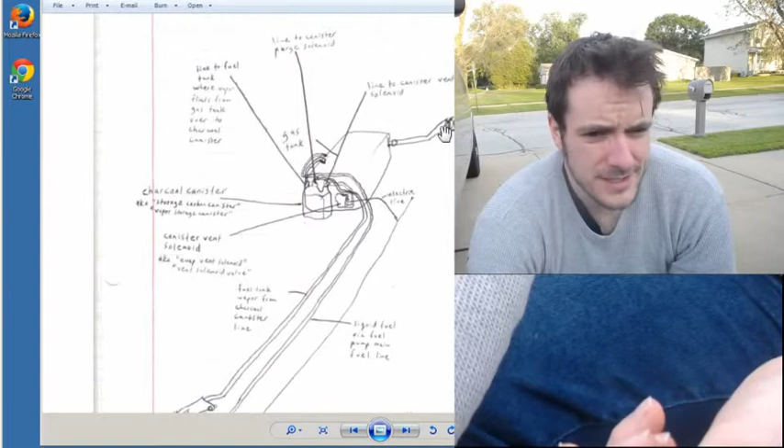Inspect. Okay. After each of these, you can retest it. If there wasn't any rust there, obviously you know that's probably not it, but you could still lube it if you want. Okay. Inspect the gas pipe neck for rust and pinhole leaks under the rust. Repair if found and retest. Okay, so that's saying inspect here underneath the gas cap, inspect that for any pinhole leaks or rust, which I've already done.

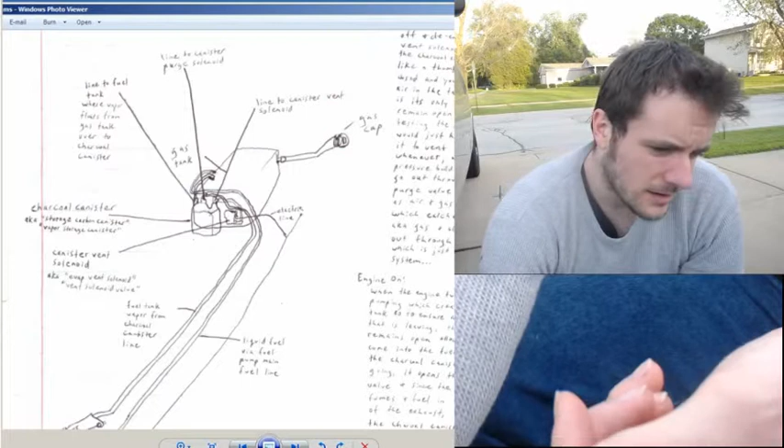Let's see. Where am I at? Okay. If that doesn't do it, inspect gas cap pipe all the way back to tank and inspect all fuel lines and rubber hoses leading from the gas tank and running to the engine, and all hoses inside the engine bay as well for leaks. Visually inspect, repair if found, and retest.

Okay. No, I'm not running Windows 2000. I'm running Windows 7 Classic theme. Okay.

Next, if you don't find a visual leak and solve it, locate your charcoal canister purge solenoid valve inside the engine bay. With vehicle off, blow air pressure toward that with a handheld air vacuum pump, a few squeezes to about halfway point on the meter. If it holds pressure, that verifies it's turned to the off position and fully closes when off. Your purge valve is good. If it does not hold pressure with car off, purge valve is bad. You need to replace and retest system. Okay.

So the next thing is from the charcoal canister purge solenoid valve inside the engine bay. Detach hose from that, which leads to rear of car's charcoal canister, which is a large black box with charcoal inside that filters gas fumes. Attach handheld vacuum pump to that hose, the hose coming off the purge valve, leading toward the back of the truck.

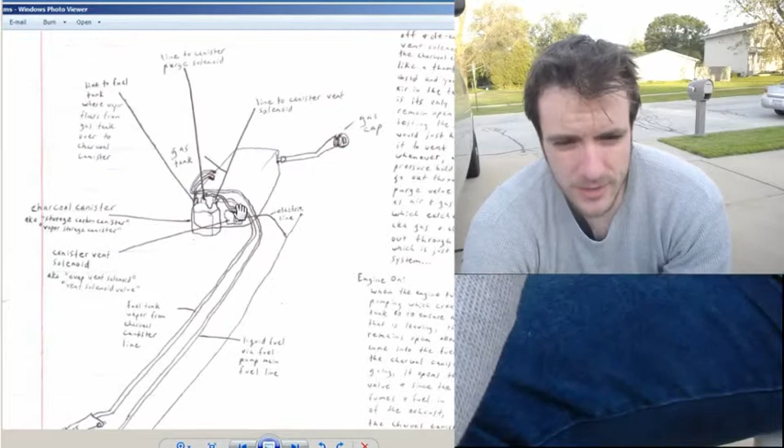Locate the charcoal canister vent solenoid valve after you've connected the handheld air vacuum pump. You're going to locate the charcoal canister vent solenoid valve, which is back here. You're going to pinch off this line, the line leading to it. Because it's open with the vehicle off, you need to pinch it off so that no air can escape when you do your air pressure test. Okay, connect it to this hose on the back end.

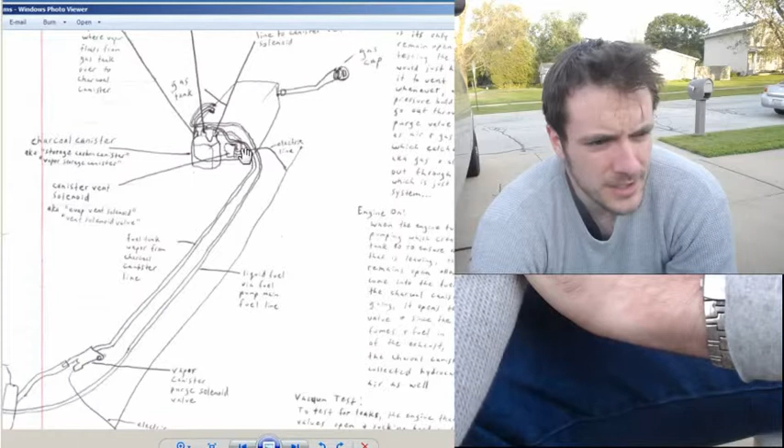We're going to be blowing air through this line into the charcoal canister, filling the charcoal canister, filling the gas tank. It won't be able to come out through the vent valve because we already clamped this off with a vice grip, and our gas cap is screwed on tight. So when we blow air through this line going this way, it should not be able to escape. If you see it escaping, then you know that there is in fact a hole somewhere, and that's when you do your smoke test. Okay.

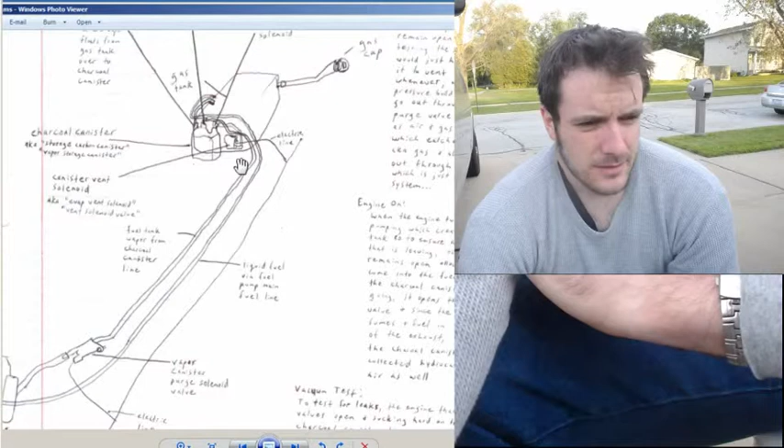Now, if it does not escape, then you know that it's something wrong with your canister vent solenoid, which we have taken out of the picture because we have vice grip clamped it shut. Because the system's airtight, we know that this must not be closing during the diagnostic phase. So you would replace your canister vent solenoid. And to verify that that's messed up, you can take it out

and you can apply a charge to it and a ground to it with a battery, like a lead acid battery, I guess. I'm not sure exactly how you do that, but you would apply a charge to it so the solenoid shuts it to off position, then you try blowing through it. And there's videos on YouTube already about how to test the canister vent solenoid to verify that it's messed up. But we've already been able to rule that as being the problem through our air pressure test. So that's what the air pressure test tells us.

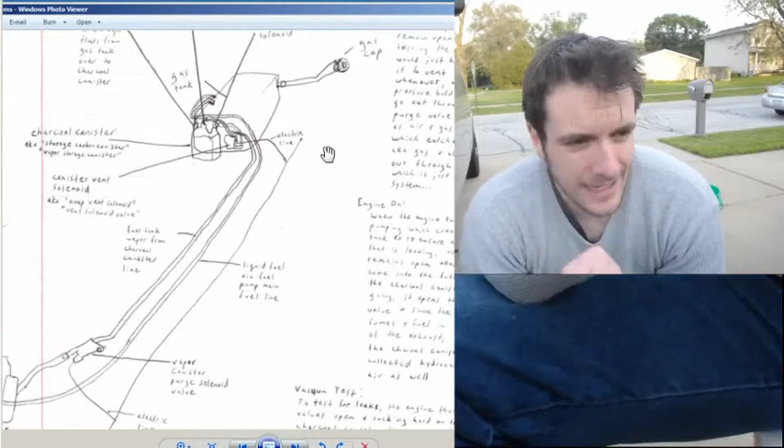Now, if that air pressure test, as I said, did not pass and air was escaping, most likely our canister vent solenoid is fine. We've already tested our purge solenoid valve, and that's fine as well. Since those two valves, the vent valve and the purge valve, are fine, then we know that there's clearly a leak somewhere in one of these lines or in the gas tank. That's where the smoke test comes in.

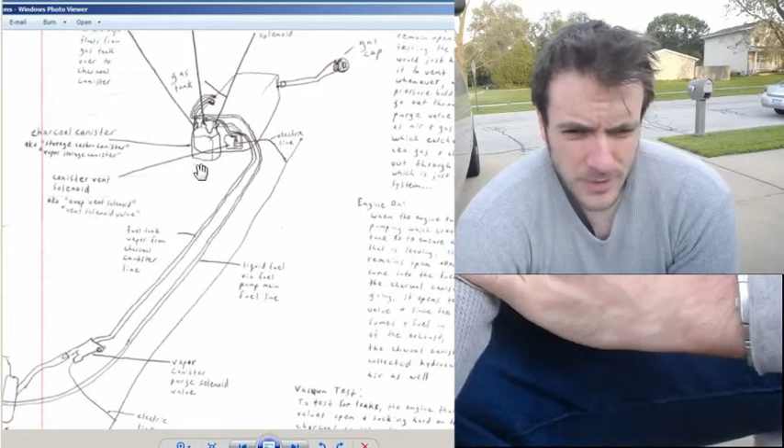And for the smoke test, you are going to either rent or purchase a smoke testing machine, and you blow smoke this way and it fills everything, and you'll see it coming out the gas cap or coming through a little hole in one of the lines somewhere. Or you could do what I'm planning to do, since those machines are $800. You make your own machine, and there are videos on YouTube already on how to make your own machine. But I have a really cool machine design I came up with that I'll go through in another video. I guess I can overview it really quick.

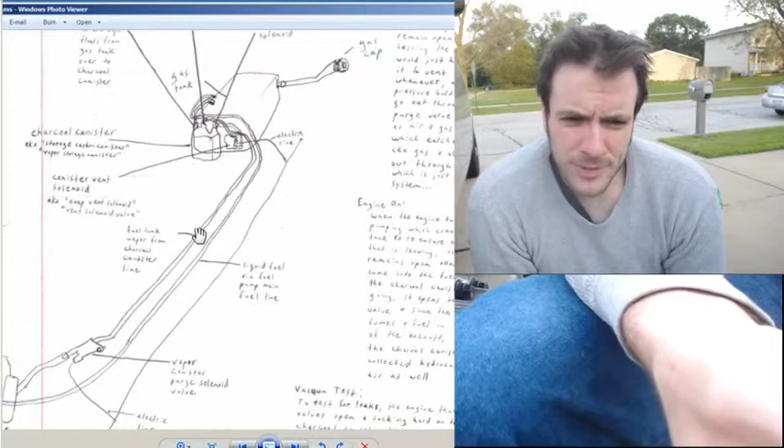So basically my idea: a vacuum, because everybody has a vacuum. Use the exhaust of a vacuum, connect that to a hose, connect that hose to a paint can after bushing it down to a smaller size, and then that's going to be your air supply. Inside the paint can, you're going to put charcoal, charcoal embers from a grill, and you're going to dump mineral oil on that, which gives off a ton of smoke. You're going to put the lid on, and then through the other side of the lid, you're going to have another hose, which you then connect.

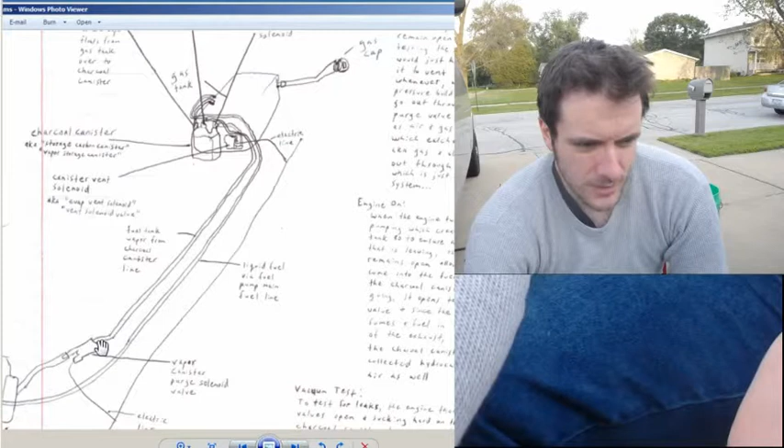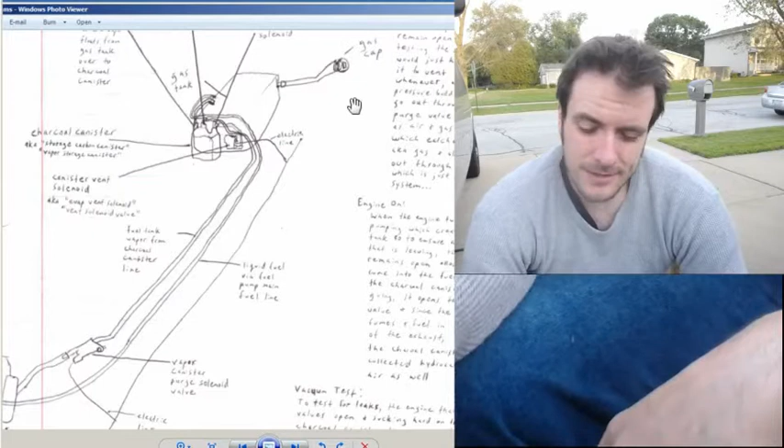You're going to want to connect it downstream of that, so on this side of the line. So you're going to unplug this hose from the back end of this, connect it here, and blow it down toward your charcoal canister. That way you'll be able to see where the leak is. Is it a crack in the charcoal canister? Is it a crack in the gas tank? Is it a crack in any of the other lines? Is it a bad fuel cap? So that's how you do it, and that's it. That's everything you need to know to diagnose and correct and troubleshoot in order. That's the order I think is the best order.